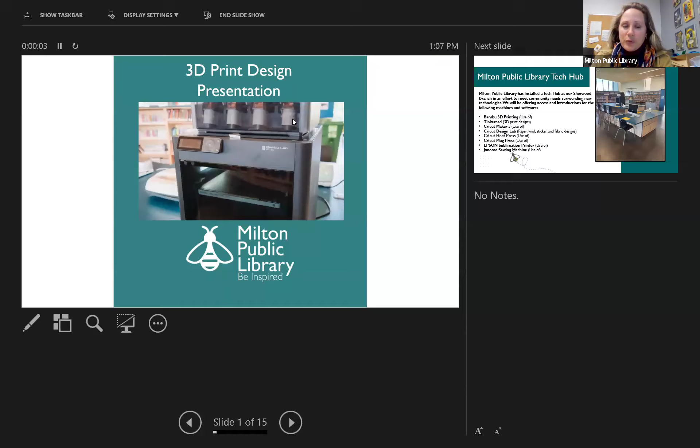So to begin, I'm going to share just a small little presentation that we have prepared. And in this presentation, you'll note that we have more than just a 3D printer to offer at the Tech Hub at Sherwood Branch. We also have a variety of other technologies, including a Cricut maker, a mug press. We have a sublimation printer that goes along with the mug press, but also a heat press that works in conjunction with the printer, so you can make tote bags, for example.

We have a Janome sewing machine as well that we're offering. And we keep adding new technologies as we hear from what the public wants and what the public needs, and we're trying to adhere to those needs.

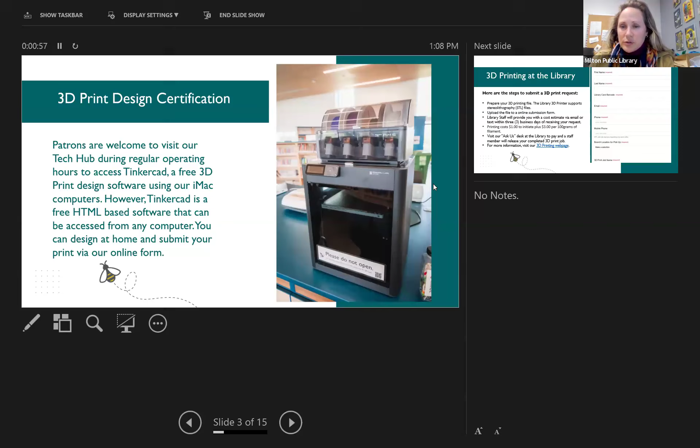So the 3D print design certification class, we call it a certification, but it's only really just getting you familiar with the use of the technology. And once you feel comfortable, then we invite you to come and explore the Tech Hub on your own. So once you've taken this particular class in person, we then make a note on your library card that indicates you have gone through all the preliminaries and you're ready to explore on your own.

You can submit a 3D print for printing without taking this class. We've had this service for a long time now. If you find an accessible STL file online, you could be using a website called Thingiverse, for example, where there are a lot of free STL files at your disposal.

You can download that and then upload it to a form that we have for 3D print submissions. And what happens is one of our staff reviews the form, they get back to you, they give you some pricing details. If you're wanting to move forward with the print, we then do that and we arrange a pickup time. All of the information you need for 3D print request submissions can be found on our 3D print webpage.

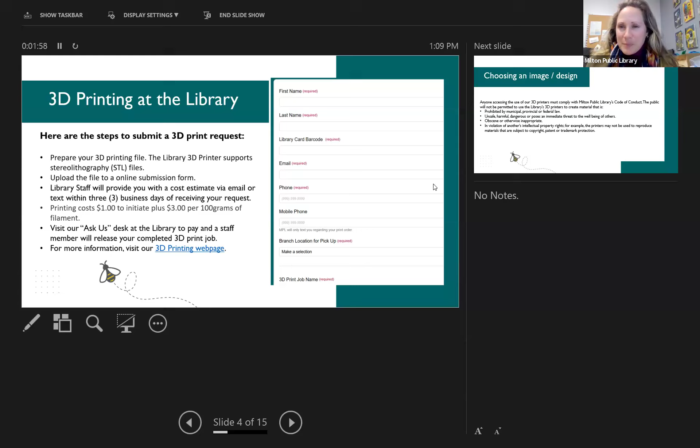At beinspired.ca, and you can also come and speak to any of us here at the library, and we'll be more than happy to walk you through that process. However, if you are wanting to explore the design elements of 3D print, this is a great class for you just to get your feet wet, as I said.

In both cases, whether you're submitting an image that you found, an STL file that you found through Thingiverse, for example, or if you're creating your own, it's so important that you do adhere to the library's code of conduct. And we just want to make sure that we're not printing anything that's going to be harmful or dangerous to others. We want to make sure they're following the law, of course, and we also want to be respectful of copyright laws.

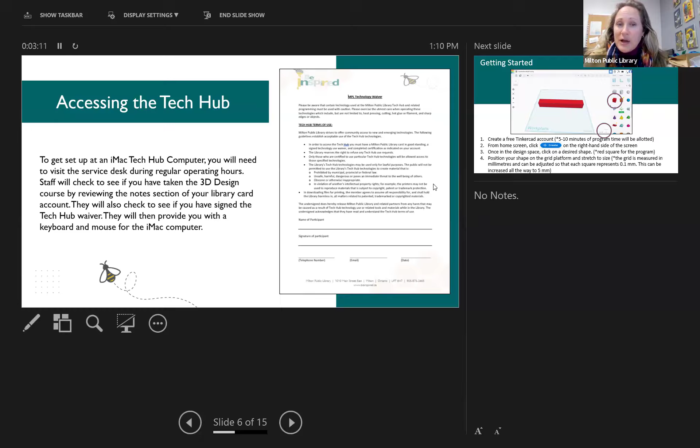When you access our Tech Hub, we just ask that you complete a waiver, and this can be done in the class that you're undertaking if it is 3D print design. Basically, we just want to go over the code of conduct again. We wanted to be very mindful of the fact that you are dealing with technology, and sometimes there are some sharp parts and there's some details to the technology that we need to be careful with because they could be very delicate, in which case we kind of highlight those things in each one of our course offerings.

To get started in Tinkercad, it is a free account. It does take a little bit of time to set up your account, so we recommend that you try doing that before you undertake the class. However, we will allot about 5 to 10 minutes at the beginning of each class to help walk folks through developing your own account.

From the home screen, and I'll walk you through most of this in just a moment, you're going to click Create, located on the right-hand side of the page, and you'll be able to start your design. You'll have a free canvas to start working, and on the right side of your page, you'll have a variety of different shapes that you can choose from.

We are going to choose the red square to begin with. When you click it, it will be almost like it's attached to your mouse. As you move your mouse, you'll be moving that object with you. Then when you click again, it will drop down onto your work plane, which is this grid that you see, this blue grid.

You're going to position your object on the grid. You can move it back and forth, and you can also use your arrow keys on your keyboard to move it. You want to position it so that you can use the grid to your advantage for measurements. The grid is in a millimeter measurement form—it's a simple conversion to centimeters if you're needing to do that. You can increase the spacing from 0.1 millimeter to 5 millimeters, given the squares on the grid.

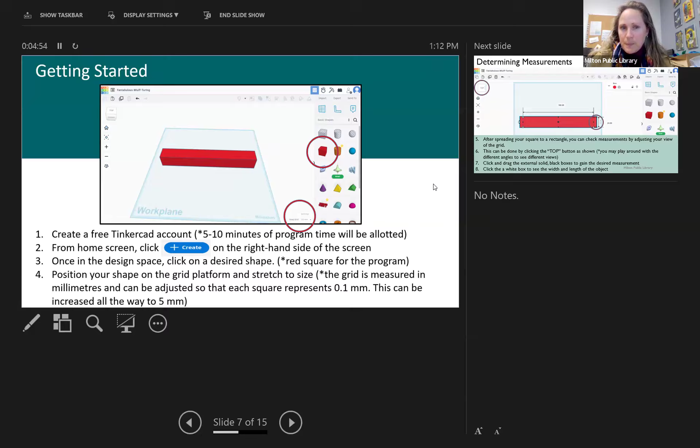When you're determining your measurements, it's easier sometimes to click on the actual object you're working within. If you click on the external side of the object, you will have this measurement construct come up on the screen where it tells you your width and your length, for example 160 millimeters by 24 millimeters. You can also find out how tall your object is, the height. This is great to work within because if you need to create something very precise in measurement, you will know what you're dealing with.

In this particular project, what we're going to be doing is creating a keychain. The keychain will have different elements involved, so measurements will matter. We recommend that you create a size around 160 millimeters for width and about 24 millimeters in length.

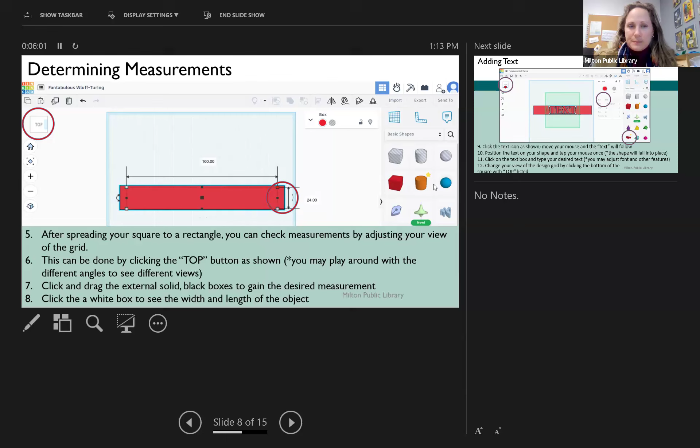Now, how did we click and create that rectangle? I'm going to walk you through all of that on a live screen in a moment. But it's important to know that when you click on your object, you'll have little squares that pop up—some white, some black. The black squares indicated in the corners, if you click and drag them, you will be able to increase the size and stretch your object. That's where you can take what originated as a red square and make it into a red rectangle, which is kind of what you see on the screen.

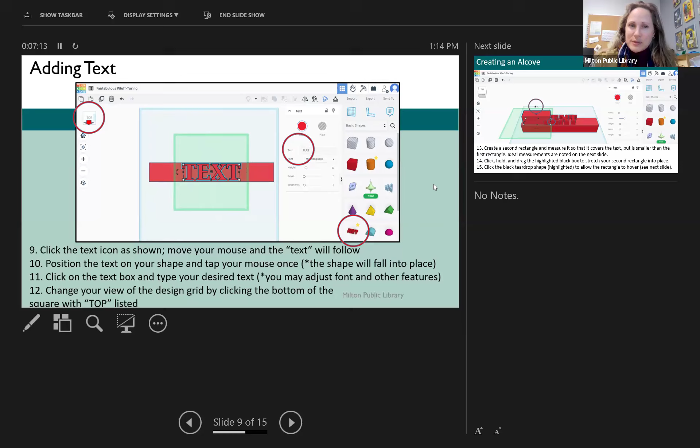You can then also add text by clicking on the text icon to the right, and you'll do the same thing—it will be attached to your mouse. You'll draw your mouse over your object and release it onto the object. Now, when you do this, they're not combined quite yet. They're two separate entities; they don't really belong to each other. So what needs to happen is eventually, when you're ready, they need to be combined together so that the computer system knows you're telling it it's one piece, one whole. We'll go over that as well.

Now, the third component to this project when creating a keychain is to create another red square, or what will be a rectangle. Make it slightly smaller so that it can fit within your larger rectangle. You can do that by placing it over top—it's almost like a dry fitting over top of your larger rectangle. Once again, using your solid or dark squares, you can drag it and stretch it into place.

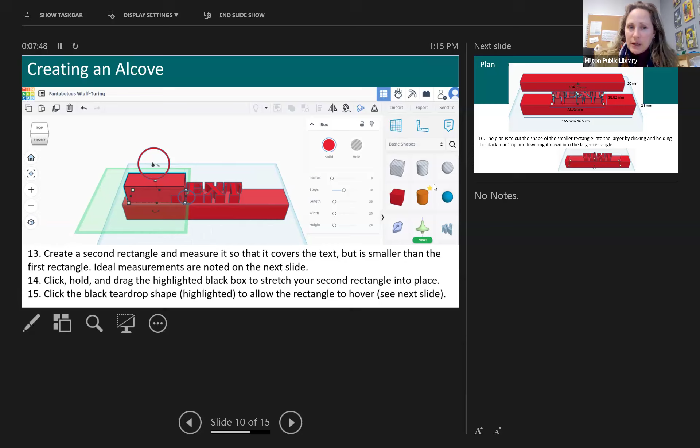For this project, if you want to be very precise, you'll have a 165 millimeter by 24 millimeter original rectangle. You'll want your text to be smaller and fit within, so probably about 73 by 18 millimeters. Then the rectangle that goes over top, that we're relaying within to create an alcove, should be slightly smaller, about 134 by 20 millimeters. You'll see what I mean in just a moment.

If you see the smaller image on screen, what you're going to do is click on the prism looking object, the teardrop object just above the top of the screen for where the smaller rectangle is. When you click and hold that and drag it down, you're going to sink the smaller rectangle into the larger rectangle, like what you see in this second image. The idea is to subtract one rectangle from the other to create an alcove, a space that text can sink within.

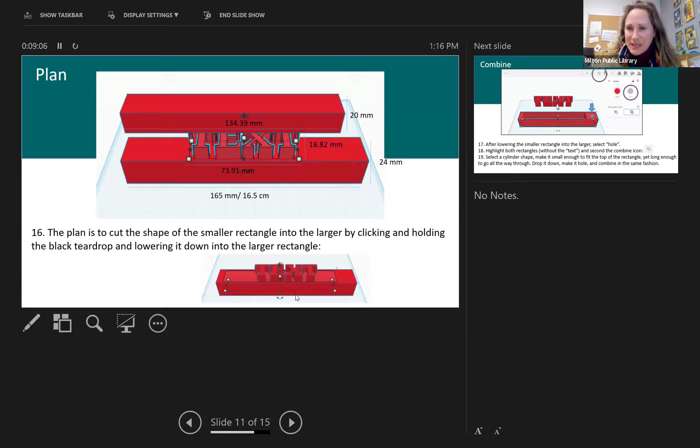So it will look like this when it's all said and done. Hover the text a little above the two rectangles, highlight both once the smaller one is sunken into the larger, click the icon, and then click the combine icon, which is a square and circle icon. A chunk of the original rectangle will be removed, creating an alcove, and you can then sink the text you selected down in.

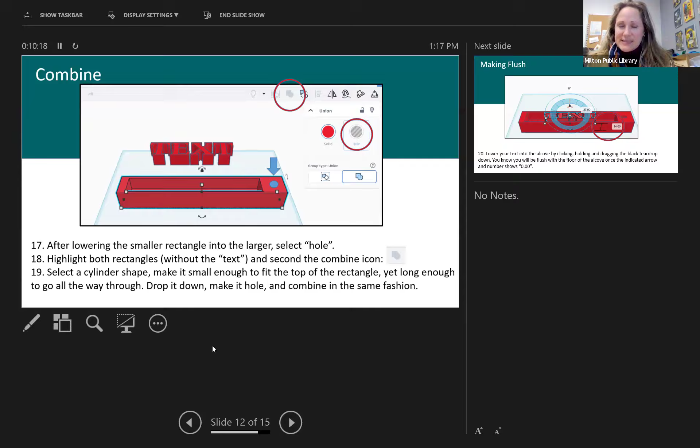So if I wanted to make one with my name, Natalie, I would type Natalie instead of generic text, and that could be inserted into what will eventually become my keychain. You drop the text the same way you dropped the smaller rectangle: click on the teardrop or prism looking object, and drag down onto the surface of the alcove.

It's going to look like this, and you'll know when you reach the surface of the alcove because the arrow you see to the right of your screen, within the red circle, is going to collapse and the number will say 0.00. So you know you're flush now, you've reached the surface of the alcove.

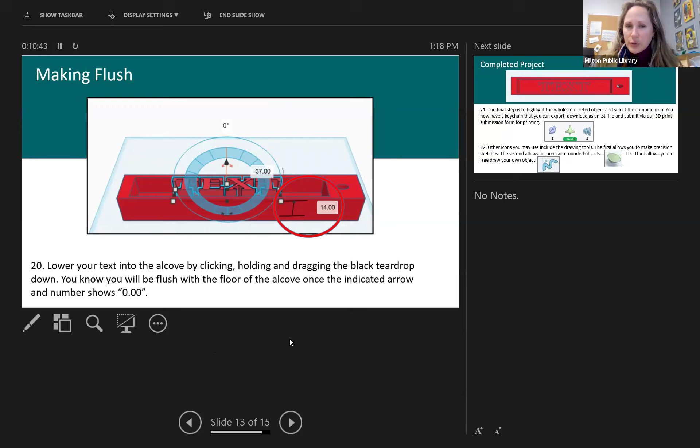You're going to do the same thing: highlight the whole object now, and click the combine button, and now you have a full complete object.

Something I didn't mention is you could create a little hole using the cylinder icon. Just the same way you found the square or rectangle icon, you can find a cylinder. Make sure it's long enough that it can create a hole through the whole piece, so you can put a keychain through if you wanted to. You'd do this the same way as the alcove, except it wouldn't be an alcove, it would be a hole through the entire object, and then you'd combine it to make it one piece.

The final icons I haven't spoken about include sketching tools. The first one is where you can make precision sketches by connecting dots on a grid. This is a great icon to use if you're wanting to make your own text. Sometimes if you choose the fonts available within the Tinkercad program and want them to stand alone, it may not work when 3D printing because if you have a hole in the middle, like in the letter O or the letter A, there's a triangle that creates a space not connected to the rest of that letter. So you could use this tool to create a connection in that letter.

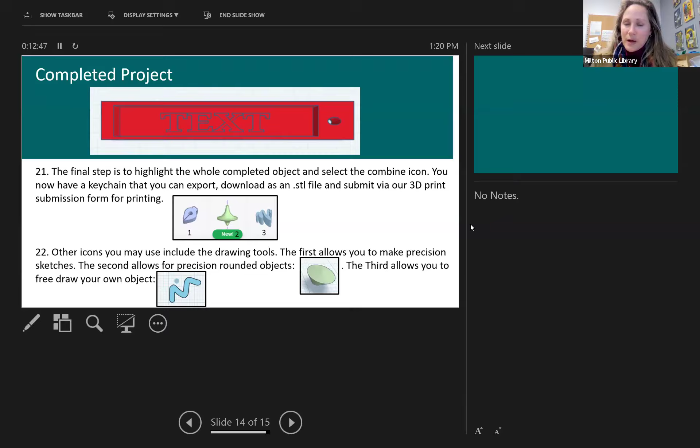And then the third one is a freehand drawing tool where you can create your own object, and it's a lot of fun. So once you get familiar with Tinkercad, it's really just a matter of tinkering and getting used to the different icons and available options within the space.

I'm going to stop sharing this screen and go into the Tinkercad program and walk through how we do this very simple project together. It is just that - a simple project, and you're going to feel very enlightened once you feel that you can do this on your own.

So I'm sharing here my screen, and you can see in Tinkercad, once I've signed in and created an account, we have a landing page. Over to the far right, you have the option to click create. So we're going to do that, and we're going to create a 3D design.

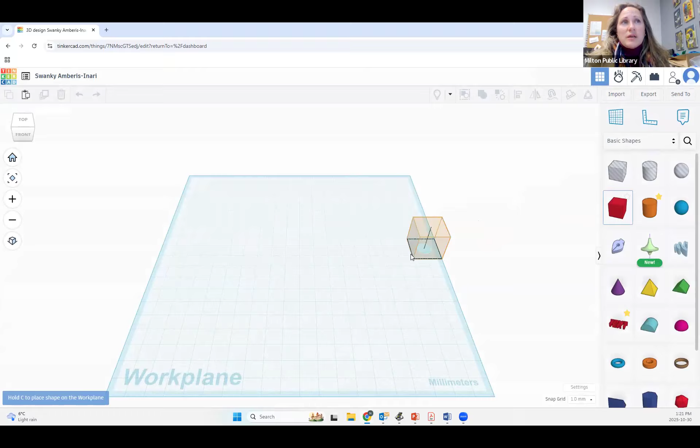And these are all the options, as I was mentioning, on the right-hand sidebar. I'm going to click on the box, and as soon as you click on it and start dragging your mouse, it's going to be attached to your mouse, and I'm just going to land it onto the working sheet, and it can land by clicking your mouse again.

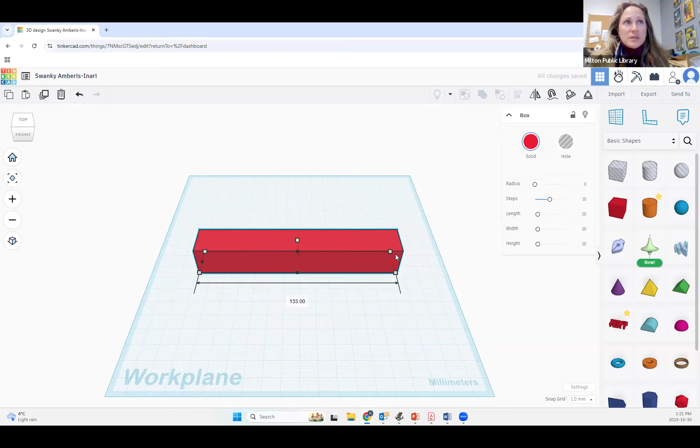Now if I click this right black square, I can drag the shape into whatever size or measurement I'm hoping to achieve. And to get a better view, since I don't know how big this is visually from just the side profile, I can go up to the top here where there's a kind of box or cube.

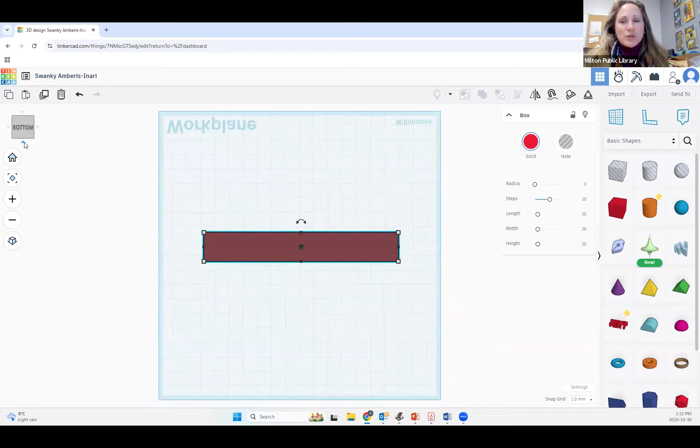And if I click top, I get a top view. If I click just slightly below, I can go back to the first view that I had. I can look at the front of the object, and I can look at the bottom of the object if I want to. So you get a variety of different views.

You can also zoom in and out using these icons on the left of your screen. So now that I have an understanding of how large it is from a bird's eye view, I can click on my object and hover over the right corner square, and I can see my measurements.

So I remember that I wanted my measurements to be a little larger than this. I think I wanted it about 160, 170 millimeters long. So maybe we'll go with 165.

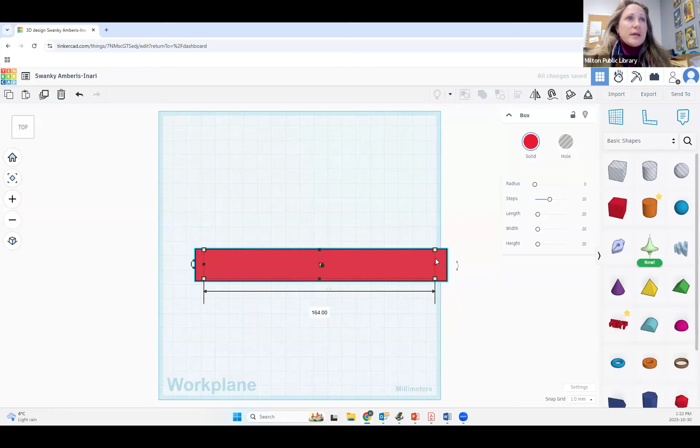And I can move my object - as I mentioned, you can use the arrows on your keyboard to do this as well - into place. And I can also stretch my object this way if I want to, in the middle, to 24, as I had noted in my presentation.

Now, we can go straight to adding text, but let's be different for a moment and add another square or rectangle. This one has to be slightly smaller than the one below, because it needs to sink within. So we're just going to make it slightly smaller.

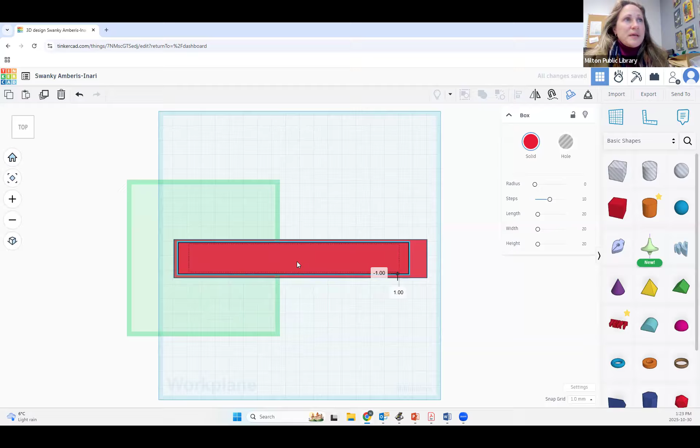And we're going to give it some space so there's a good perimeter within. I'm going to go to a different view now, so you can see it's sitting on top. Now, remember what we mentioned - you're going to click this teardrop or arrow, or I guess it's a prism-looking object. If I click on it, hold, and drag down, the object will sink into the larger object below.

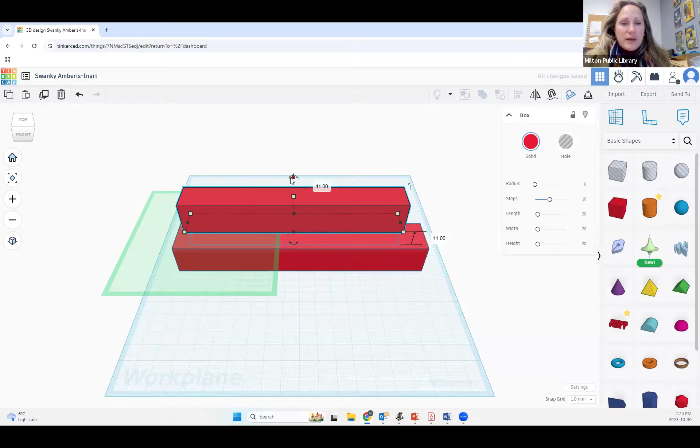Now, in order for the alcove to work perfectly, they can't be the same height, right? So we're going to reduce the height. To do that, we're just going to click this middle button - sorry, that's the wrong button - we're going to click this middle button and simply go up with it.

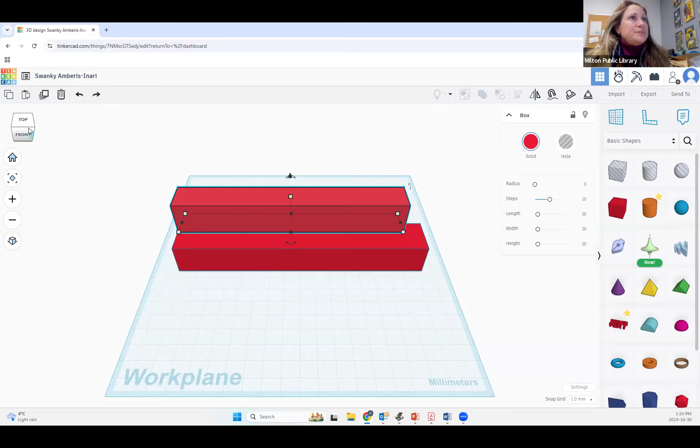Oh goodness, see this is sometimes when views are a little bit more important for us. So we're just going to maneuver this around so we get the right view. Let's do the front view. I'm just going to move this down. Now I know this is a more narrow, or shallower object than the one below, and I know this will work for me.

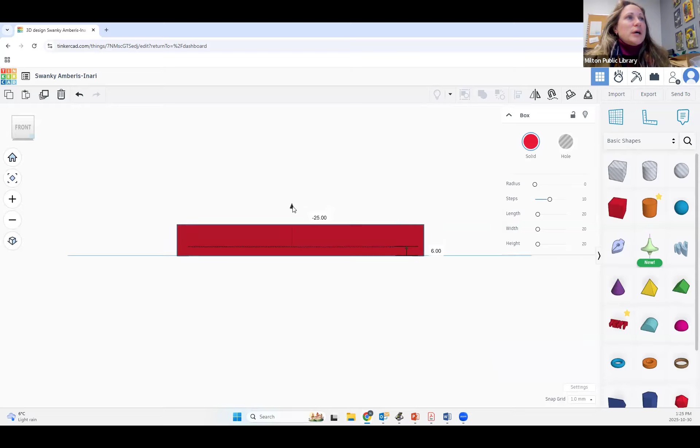So I'm going to lower it down, and I can see it lowering, and it's kind of flush. But I want a better view, so I'll go to my top view, and if I click I can see it pop up again and just sink below. So that's a perfect dimension to create.

I'm then going to highlight this object, which is already highlighted, create a hole, and then highlight the whole object together, both pieces, and go to this icon, union or group, and click. You can see that the hole was created, the alcove was created.

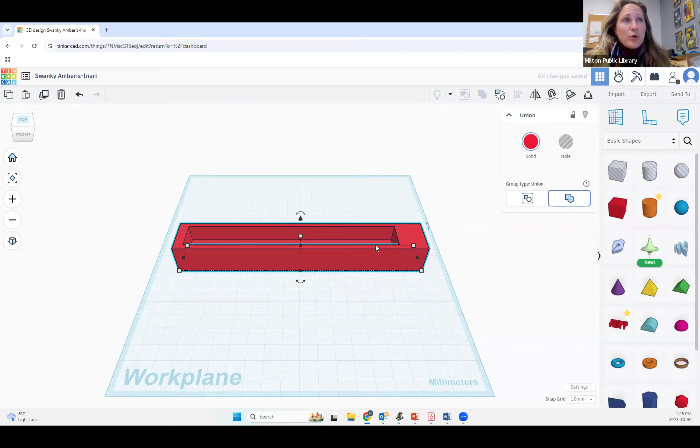Now we're going to add the text. When I do that, I'm just going to hover it over top. You want to see what your dimensions are, and how tall your object is as well. So we're just going to move again to the top view, then over to the side.

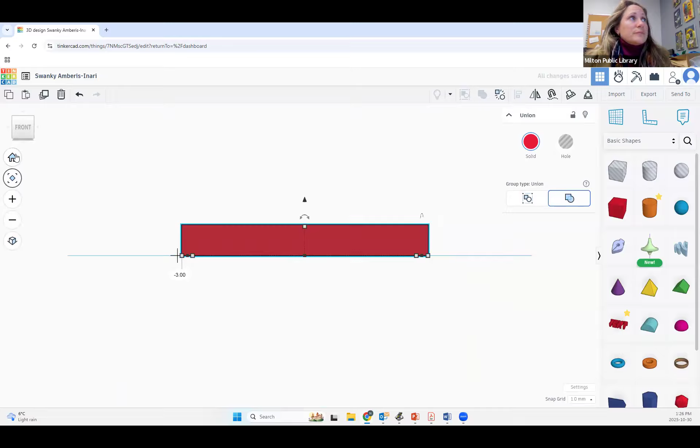I'm going to let it hover again. Oh, that's the wrong object to hover. See, once again, it's a little finicky, you do have to play with your objects a bit. So we're going to hover this one. There we go. I can go to the top, go to the bottom, get a better view of the object, and just see how it will work if I sink it down into the object.

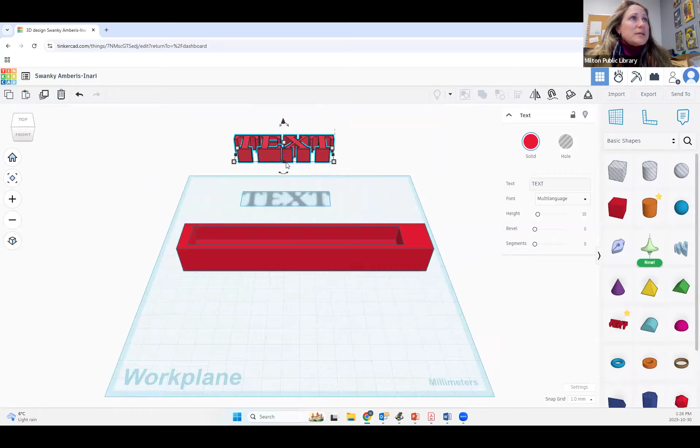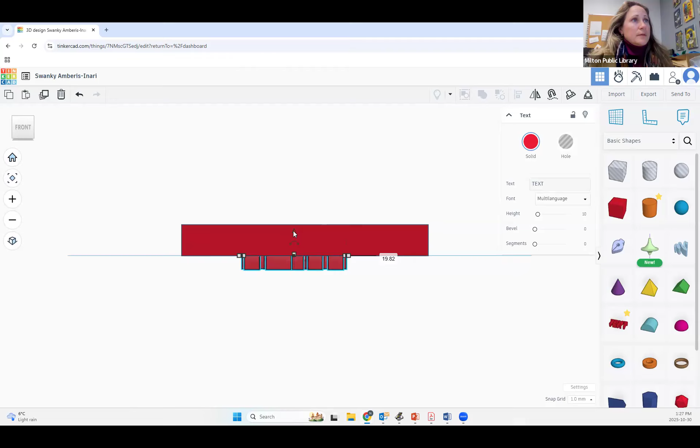Okay, so let's do a top view and then a side view again. There we go, so I can see I'm just above the base with 1.0. I can lower it a bit more so it's flush with the base, but it's probably best practice to have it a little bit above the base at 1. Now if I go back to the front, or keep working my angles, I can see the text is small enough that it fits within the alcove, and it makes for a very interesting three-dimensional look.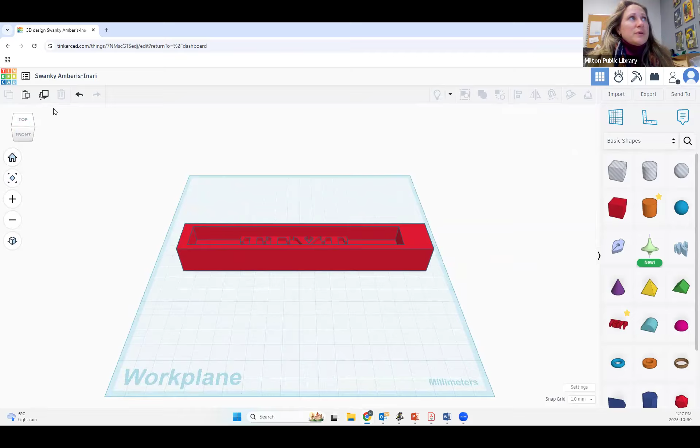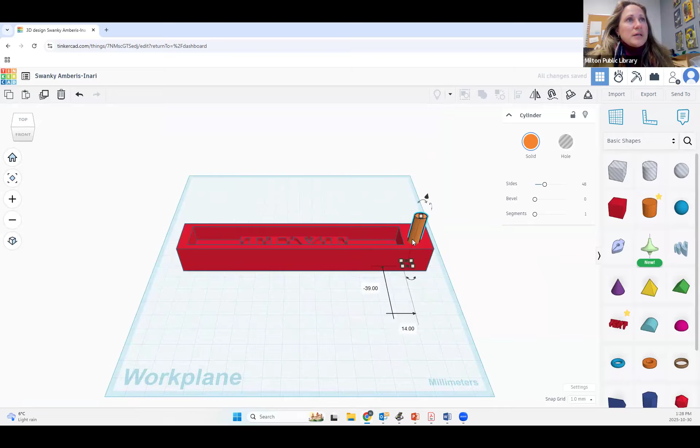And now for the last piece, I'm just going to add my cylinder shape. Again, I'll play with my angles just so I can see what I'm working with. I'm going to lengthen it, and make it smaller, shrink it down to size a bit, and then add it onto my object, poking through.

I'm going to go back to the top view and make sure it's in proper position. Once it's here, I'm going to click hole, then highlight the entire thing and combine it. So now we have a hole that I can put my keychain ring in. The text, or the personalized information in the middle, is attached and within my alcove. I have a really cute, personalized keychain that I can carry along with me.